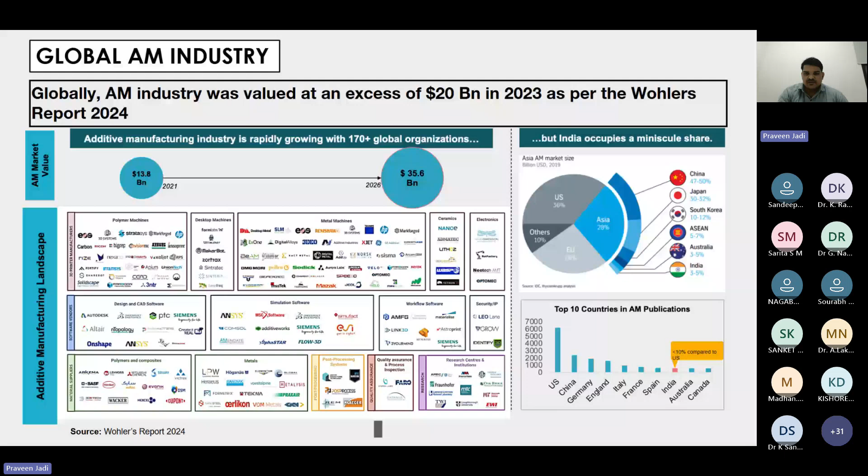So this is the India AM landscape. On the left side you can see international brands - hardware. There are multiple OEMs in 3D printing, like Meltio, EOS, SLM, already in the market for the last 10 to 15 years. You can also see materials like Voxeljet, and very few members making powders or wires. But compared to our domestic brands, previously there were only 1 or 2 members, but recently there are 10 to 20 members doing Make in India 3D printers.

Previously it was only FDM 3D printers, now it has become powder bed fusion. Now Ace Micromatic and Intech are two brands that have already developed metal 3D printers and are selling the machines. In the material section, most brands were previously very few in India, but now one startup, Matrix Nano, we have given startup funding - they have established a facility and developed Make in India powder, meaning they will make the powder itself as per your composition.

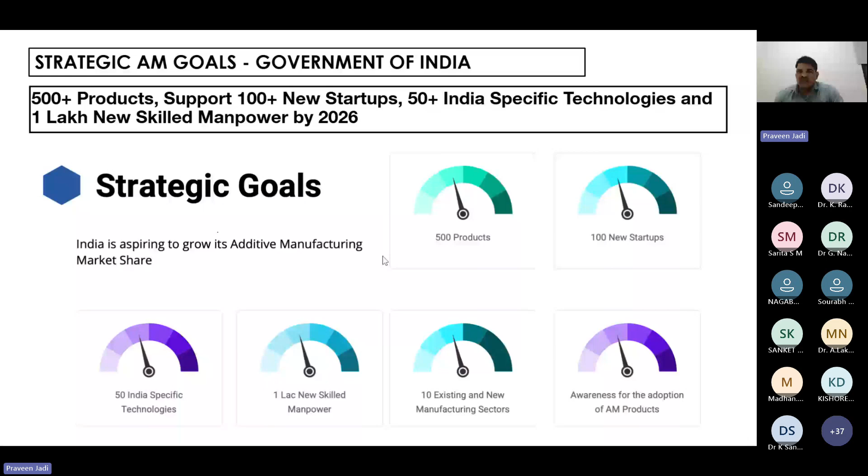NCAM building ecosystem is mainly new product development and Indigenization, as I explained in the previous slide. Skill development - we give training to students, faculty, companies, and also enable adoption of industry readiness. We prepare and give training to industries so that after their learning, they will directly go for jobs. We are also tied up with some OEMs in India.

So, for 3D printing OEMs and 3D printing service providers, if any skilled person or company is interested, we give them access to AM infrastructure. We have a Center of Excellence in Additive Manufacturing in Hyderabad, with plastic to metal 3D printers. You can visit our facility and utilize it for R&D and innovation. If any customer or industry wants to develop something new, we have separate funding for R&D, including one metal 3D printer dedicated to developing new products.

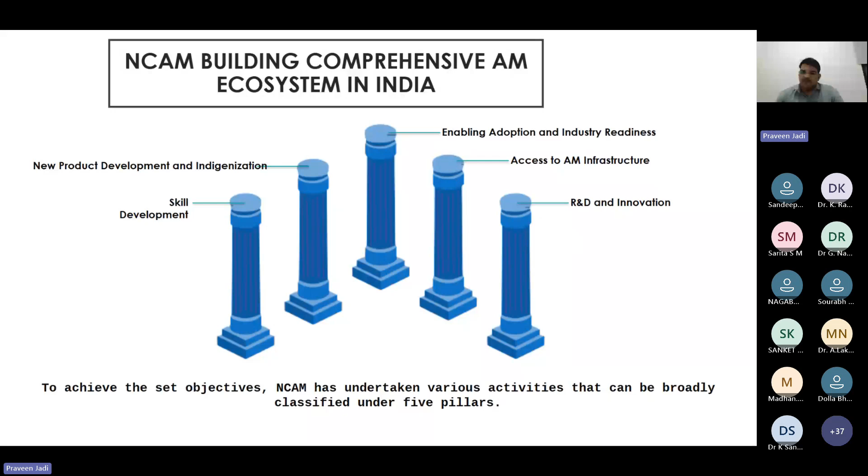This is a sample video.

This video is completely about how additive manufacturing and how NCAM is established. So, is this video visible, sir?

Hello? Yes, okay. Hello, no sir, that video is not visible. This video is not visible, sir? Yes, sir. So what I will do, sir, I will play it later, because it has to play.

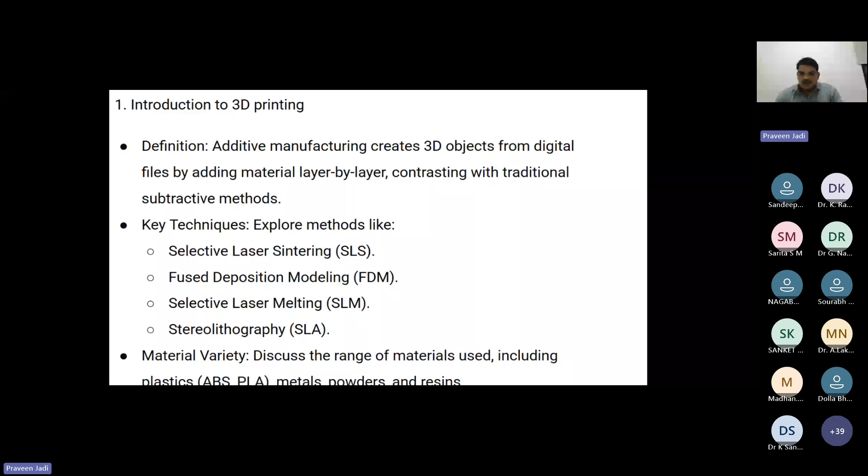There is FDM technology, fused deposition modeling, which is the basic technology. There's also SLA technology, similar to injection molding parts, where we use resin. I'll explain more in the coming slide.

For 3D printing technology, initially we have to think about how the 3D model is created. Now every person is adapting additive manufacturing for their new ideas. So first we go for the CAD model using CAD software like CATIA or SolidWorks or any 3D modeling software, then convert it into an STL file or STEP file, which can be uploaded into the 3D printing software.

Once we upload it into the slicing software, it converts into G-code. For FDM 3D printing, it's G-code; for SLA, there's a dedicated software. So as per the requirement and respective technology, they generate specific codes.

The steps involved in 3D printing: first we do modeling, then slice it using slicing software. For FDM technology, you can use Cura, an open source software. For SLA technology, there's FormLabs software, and others. For metal and SLS, to slice the CAD model into layers, we can use Magics software or Autodesk software.

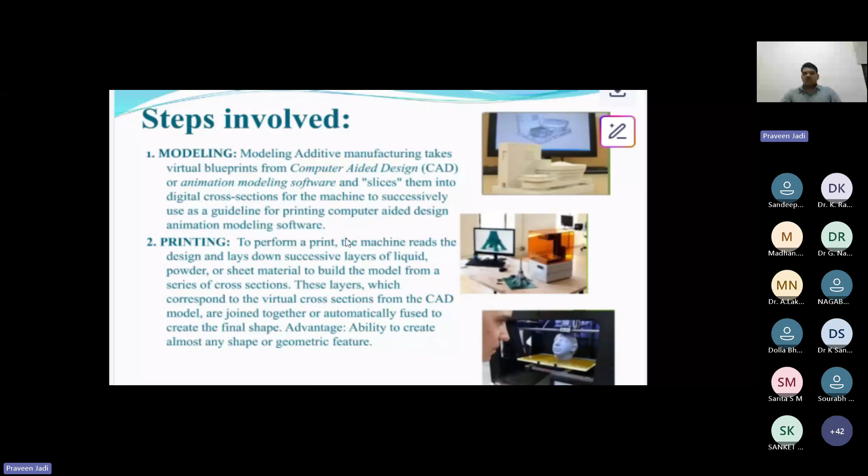The base plate temperature depends on the material used. For high-end materials, the part has to stick to the build plate, so we use build plate heating depending on the material. For ABS or PLA, the melting temperature is around 210 degrees, and the build plate temperature is 60 to 70 degrees. For PEEK material, the build plate has to go up to 150 degrees, and the nozzle temperature goes up to 400 or 395 degrees.

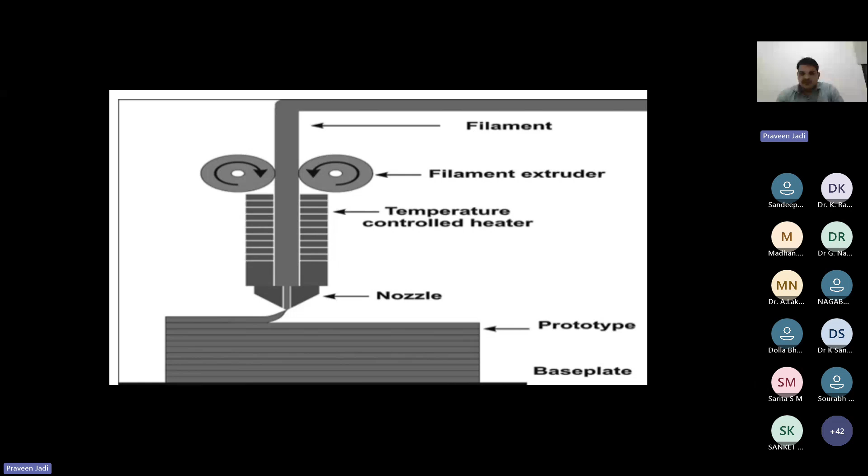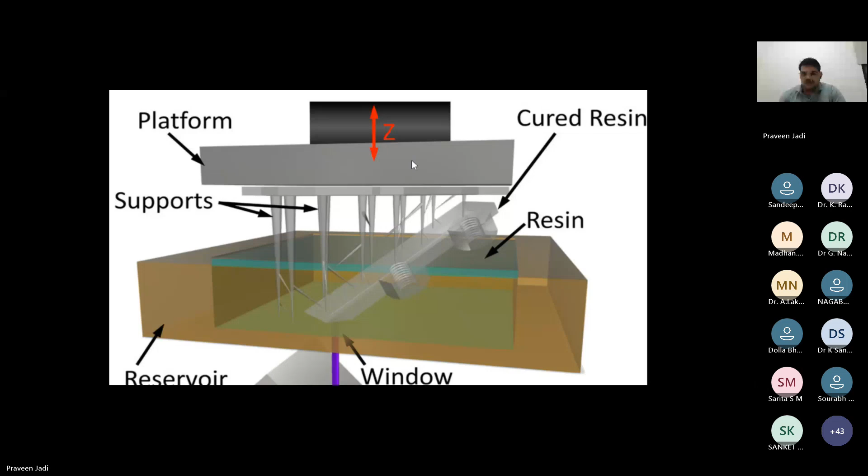Second is SLA technology, where we use resin-based material. There are two types of platform systems: top-down approach and bottom-up approach. In the bottom-up approach, the layer comes from the bottom and the laser cures the resin, and layer by layer the platform moves upward, so the part gets manufactured.

So this process is: once we give the slice to the 3D printer, the recoater will come and spread one layer of coating. Coating means, suppose if you are giving a 60 micron layer, it will spread the 60 micron layer. Suppose if you are giving a 120 micron layer, the same amount of powder, it will spread that layer. Then the laser will come and scan the area where it has to deposit.

Then accordingly the laser will come and sinter the powder. Then similarly another recoater will spread the powder. Then the laser will come and sinter the remaining area. So layer by layer it will form the part from the powder.

But before that, there is pre-production for SLS technology. Before that we have to sieve the powder. In previous technologies, whatever material is there we can reuse. Here we have to use 50% virgin powder, 50% already used powder, so that it will work.

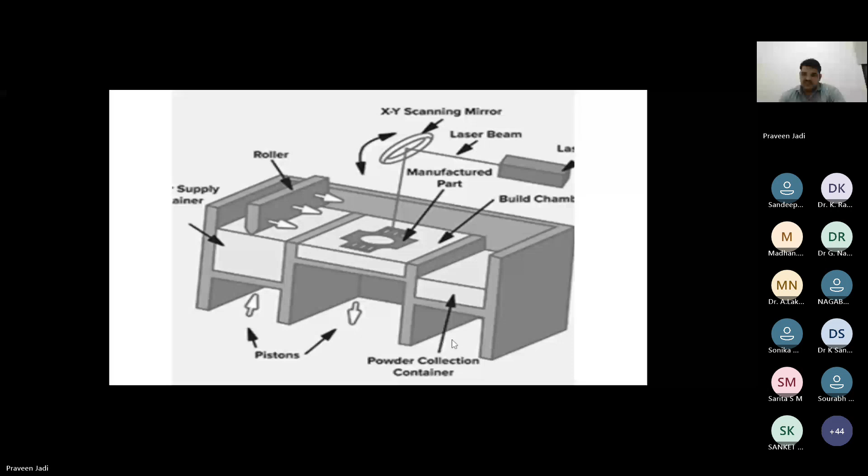This is the powder collector. Once we spread the powder, the unwanted powder can be collected from the bottom. The laser will come and sinter the powder, and layer by layer it will print the parts.

So why does industry adopt additive manufacturing? Because with machining, suppose there is a 10 kg square cube, for a small part we have to waste so many materials to get the original product. But here we are doing layer by layer, so there is no waste of material, and also time consumed is very less. You can use it for mass production.

Now production machines are available. You can go for 100 or 200 parts for the industrial purpose.

Now I am going to explain about this new technology. I have already explained about LPBF, how it works, but electron beam is the new technology where metal parts get 100% density.

In LPBF, we can get 96% density parts because of porosities, and we are using an argon atmosphere temperature, and the laser wattage applied falls differently for different materials.

Suppose if you are using titanium material, the laser needs around 600 watts. Suppose if you are using aluminum material, the laser needs only 95 watts. So depending on the requirement and the material, we have to select the laser parameters for LPBF.

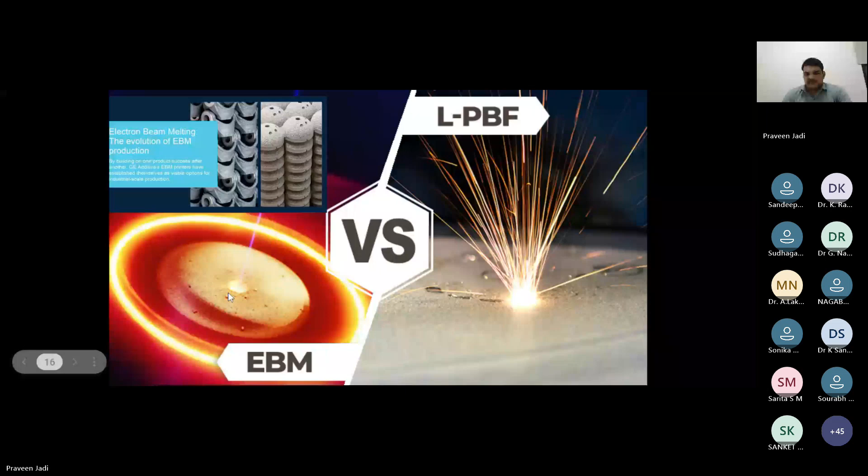This is an LPBF 3D printer. As already explained, the recoater will spread the required powder, and the laser will come and deposit it layer by layer, forming the 3D printing process.

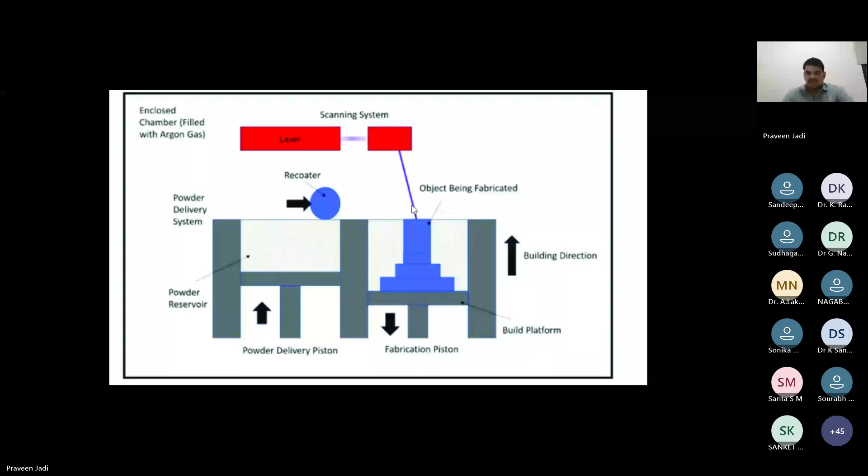For 3D printing, we have to go for data preparation like FDM. But here, for EBM technology, you can stack the part by part. Suppose if your platform is 340 by 340 by 600, the platform can go up to 600 mm, you can change the height.

The electron beam comes and falls on the powder, making it sinter.

Once we convert the 3D file for the metal 3D printer or EBM, it will sinter. Before that, we have to check the powder to avoid internal stresses and to avoid fire inside the chamber. Once we give the sliced part to the metal 3D printer or EBM printer, the process is the same for EBM or LPBF, but the application will be different.

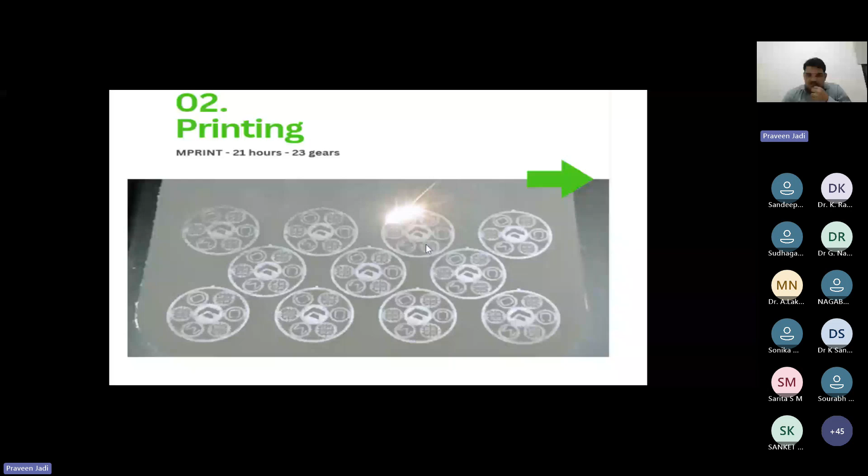Once the part is 3D printed, we have to unpack the material, remove the extra powder, sieve it again, and we can reuse that powder. But whatever parts are there, we have to go for the heat treatment process to relieve the stresses.

Once we relieve the stresses in the annealing process, we have to go for sandblasting to improve the surface finish, using solid blast media like SS beads or glass beads.

So for post processing, once we 3D print a part, we can go for wire cut EDM, or we can go for the bandsaw machine. Whatever parts are stuck, we can remove them using the bandsaw machine.

Once we remove the parts from the build plate, we go for improving the surface finish. If there are any supports, we do the removal through post processing. Once support removal is completed and the part comes off the build platform, we go for sandblasting. This is the post processing technique in metal 3D printing, or EBM technology.

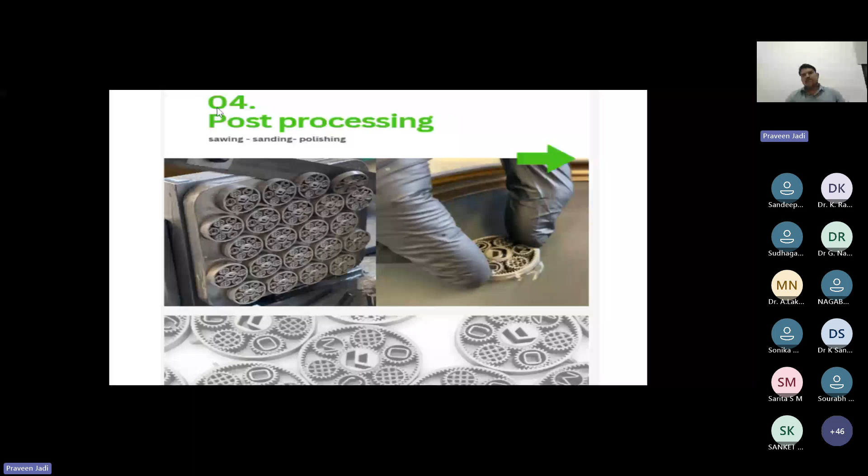EBM technology is similar. The powder is loaded on both sides and the roller comes in, and here we use a cathode beam. The cathode releases the beam and sinters the powder. It is mainly used for dental and medical applications, like cranial or knee joint applications. It gives a 100% dense part, and we can go for stacking the material.

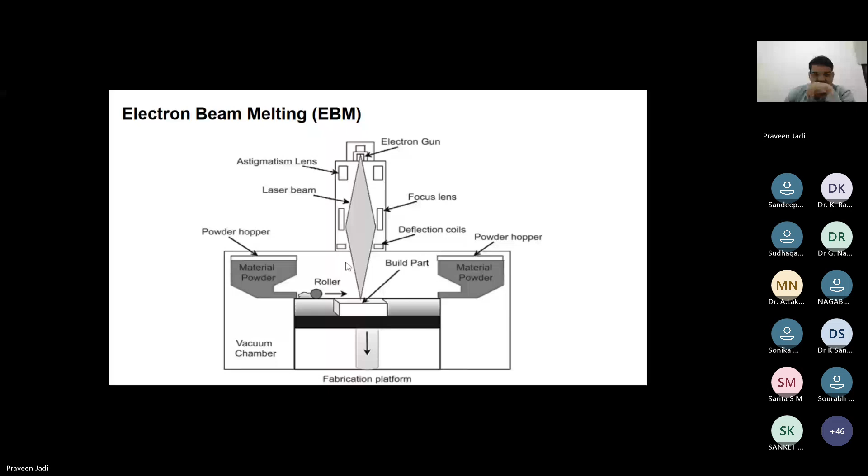For the operating environment, in EBM technology the atmosphere or chamber temperature is vacuum. In LPBF, an inert gas like argon or nitrogen is used, depending on the material.

The material properties in EBM include higher strength, faster build speeds, lower residual stresses, and it's suitable for conductive materials. LPBF also has higher precision, good surface finish, and is used for more intricate parts.

For application, EBM is used for high strength parts, since it gives 100% density parts. So it's mostly used where the part requires high strength or high pressure is applied. There, mostly EBM parts are used.

For LPBF applications, there are high resolution parts. We can get very high finish and high surface accuracy, up to 25, 30, or 60 microns. But for EBM, we have to go for a minimum of 100 to 200 microns.

The advantage of EBM over LPBF is that we can stack multiple parts on a single build platform, so at a time we can print 100 or 200 parts. But in LPBF, we're limited to the build platform area. So if printing 100 parts urgently, you'd use EBM, but with LPBF you can only print up to 10 parts.

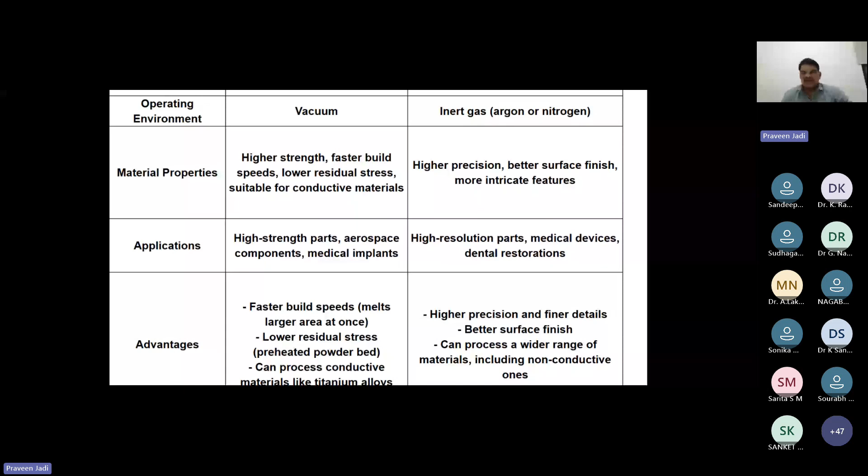The main materials for LPBF and EBM: typical materials available in LPBF are SS316, SS 17-4PH, SS304, aluminum AlSi10Mg, and titanium Ti64. In cobalt chrome, only one material is available.

Copper is still in R&D in most LPBF printers for precision applications, because it has less corrosion resistance. Most space applications are now doing R&D on pure copper for space engine applications.

EBM is mostly used for biocompatible and medical applications. Titanium and nickel-based superalloys are the conductive metals mostly used in EBM. Up to this year, only two materials are qualified for medical applications and FDA approved.

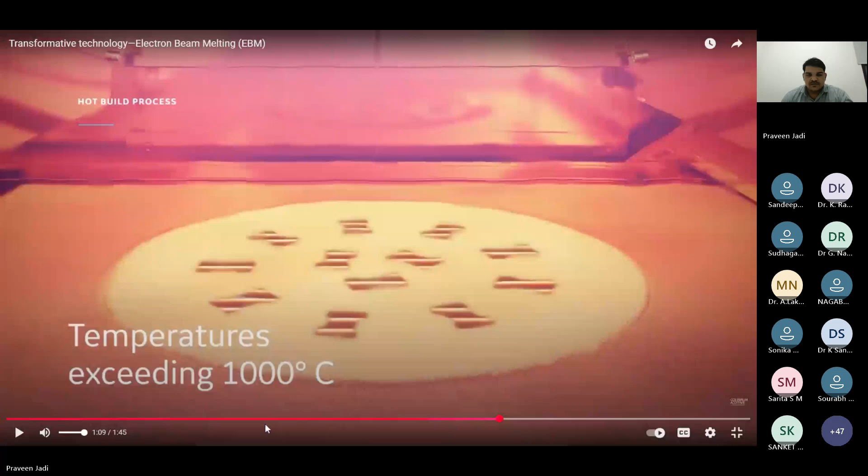Now it is showing, sir. Yes sir, now it's here.

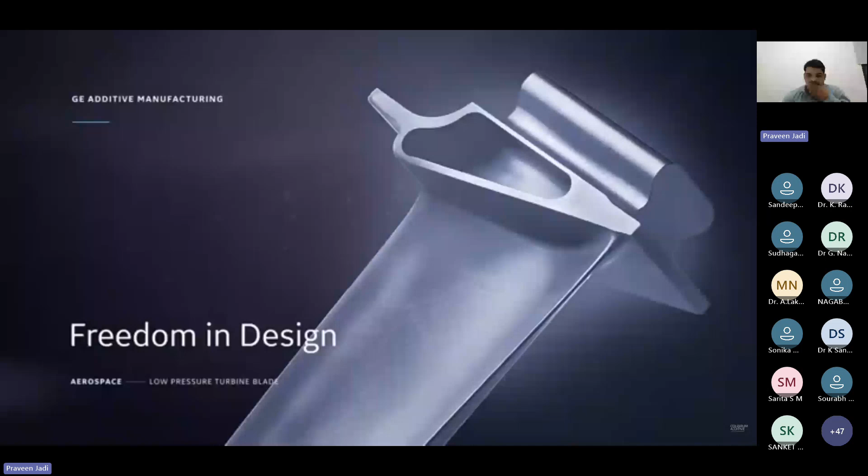Additive manufacturing offers greater freedom in design and allows for the creation of optimized parts that are not constrained by the limits of traditional manufacturing. Arcam EBM has the unique ability to tightly stack parts within the build in order to increase productivity.

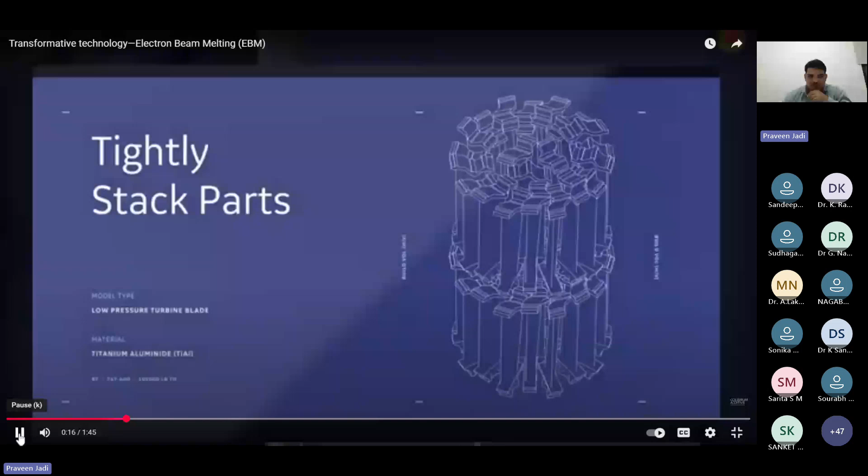An optimized build file is sliced and loaded into the Arcam EBM system. Following this, metal powder is loaded into the machine. The build chamber is then closed and a vacuum is created to ensure a clean, controlled environment that allows for the processing of reactive material.

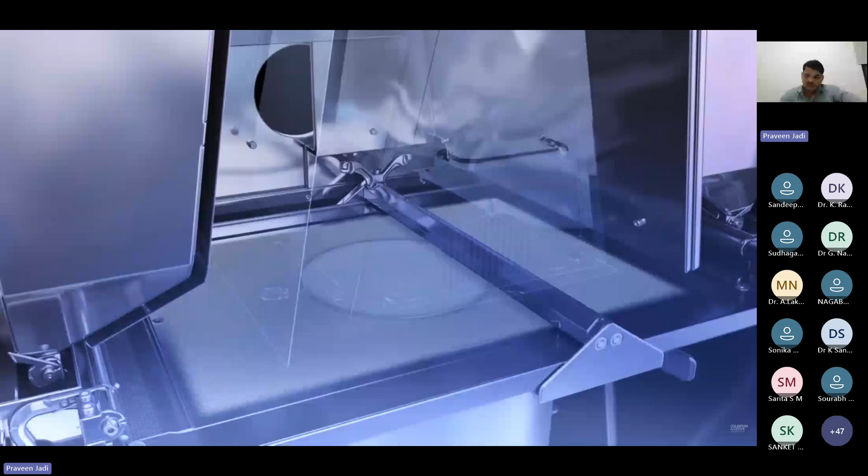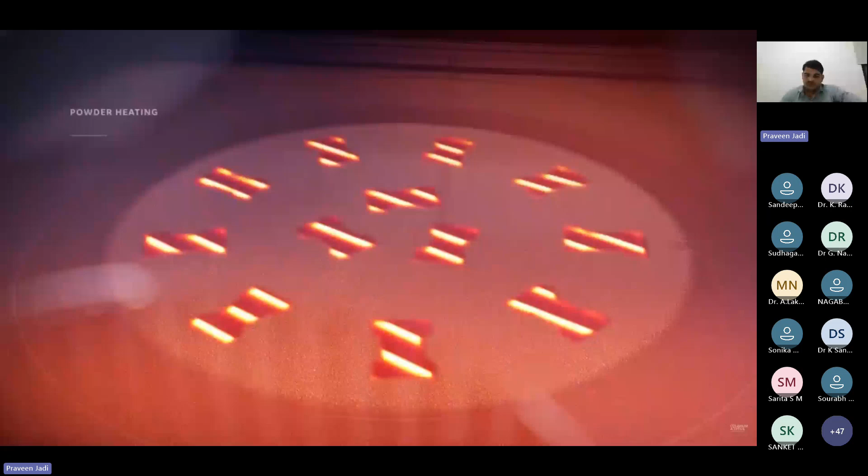Next, Arcam EBM's powder layering system evenly distributes a thin layer of powder on the build area. A powerful 6 kilowatt electron beam heats the powder bed to optimal ambient temperature and then proceeds to melt the powder, first contour melting and then hatch melting. The electron beam unit generating the beam contains no moving parts, allowing for extremely fast and accurate beam control.

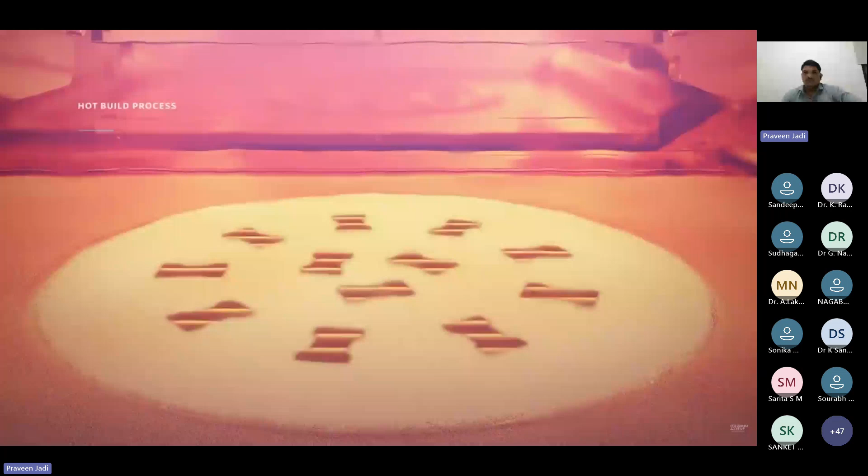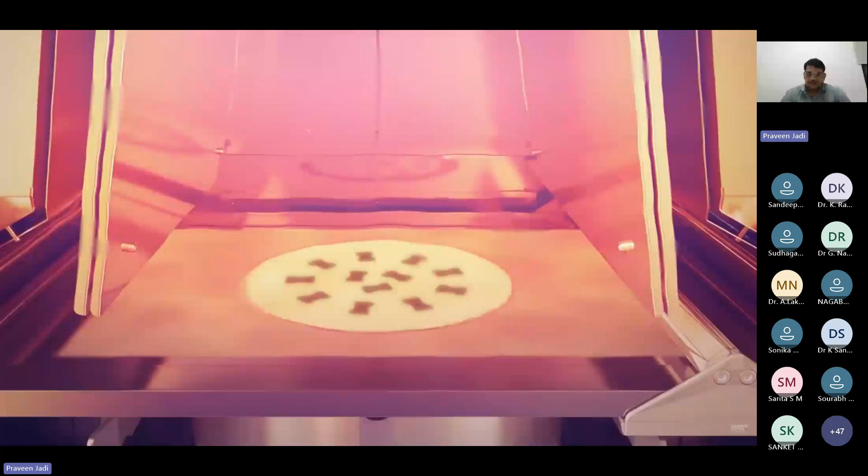The build environment is kept hot, reaching temperatures exceeding 1000 degrees Celsius, resulting in no residual stresses and allowing for the processing of crack-prone materials. As each layer is completed, the build is lowered and a fresh layer of build powder is raked over it. This process repeats, growing the build one layer at a time. When the build is complete, the tank is extracted and the Arcam EBM machine is prepared for the next build.

Hello, sir, my PPT is visible now. No sir, the PPT is not visible. Now, sir. Yes sir, now it's visible.

Okay, now the hybrid manufacturing, sir. Previously I explained about EBM, how it works and what post-processing we have to do. But in hybrid, similar to how vehicles nowadays are hybrid petrol and EV, hybrid manufacturing lets us install a probe, like a laser head.

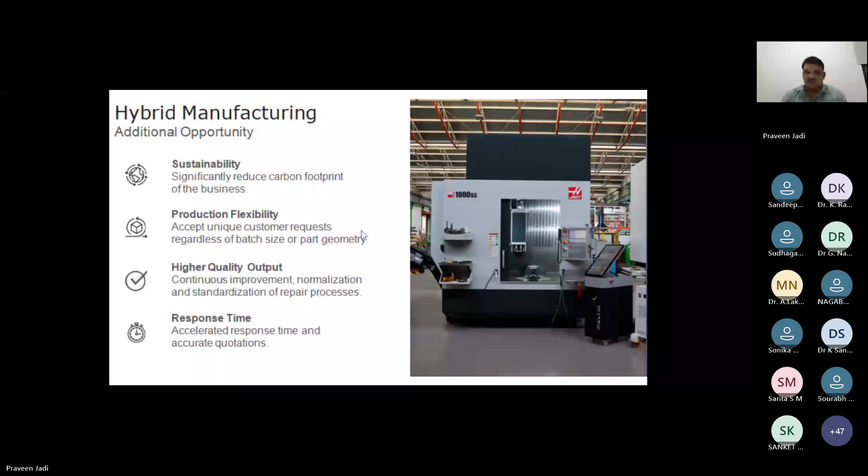Some of the parts we have printed in hybrid manufacturing in DED. So these are the solutions - there are so many products available. I'm covering Meltio engine CNC integration for hybrid manufacturing, repairs, and future additive applications, which I am going to explain. I have explained about this.

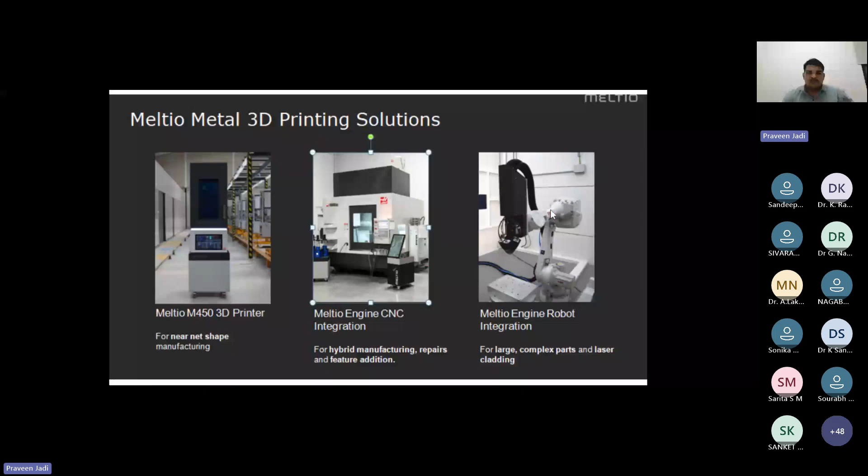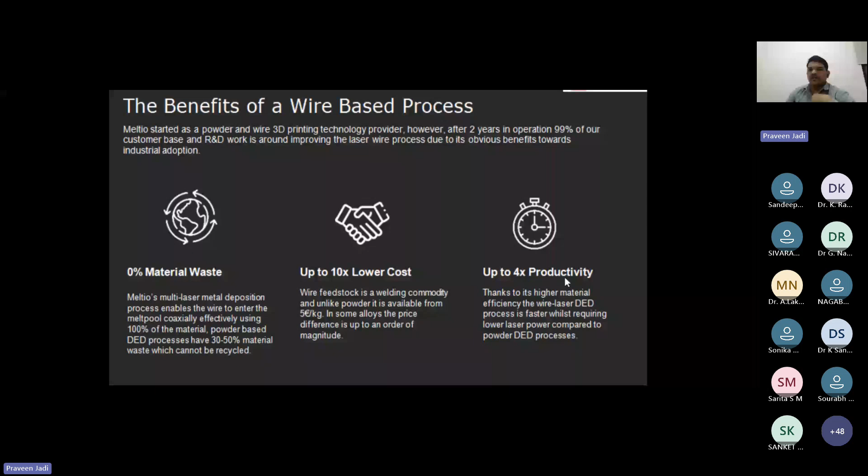This robot is for bigger parts. So the benefit of a wire-based process is we get zero metal wastage, and it's very fast compared to CNC. The cost of material is also very less because there's no wastage, and it's readily available in the market. Productivity is very fast because in CNC they take one week for production, like machining one component. Here we get it in 1 or 2 days, so time is reduced and productivity has increased.

So the benefit of hybrid manufacturing is on material scrap. Suppose if we already have CNC wasted material, we can convert it to wire and use that wire. Here we use 1mm or 2mm diameter wire, depending on the wire diameter we have to adjust in the slicing software for hybrid manufacturing. So if you are using 1mm, we have to select the 1mm diameter to load the 1mm material.

It also helps working capital by replacing inventory of cutting tools. You no longer need to spend on cutting tools in-house, because whatever tool you need, you can use a digital inventory like CAD models. Whichever part you need, you upload the CAD model into 3D printing and get the 3D printed part.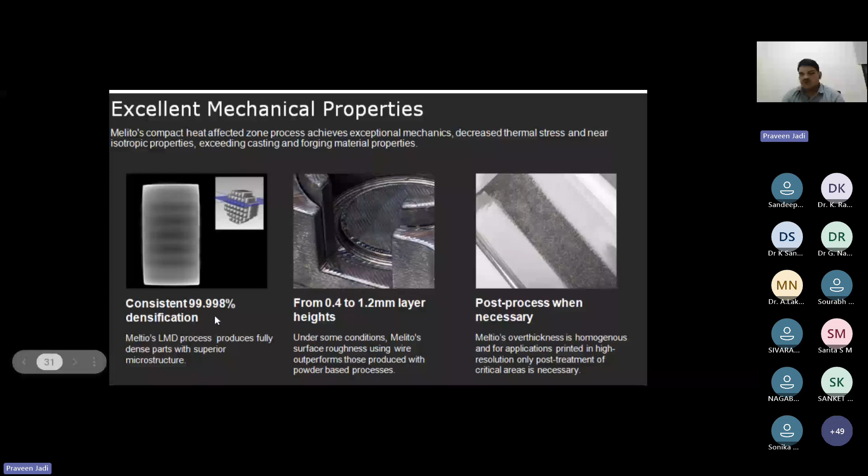You can see the LPBF machined part. Previously we get the LPBF 3D printed part, and once we machine it, we get this quality. In hybrid manufacturing also we get this type of part, but the surface finish is much less. Once we do this part in hybrid manufacturing, we get output like this. In LPBF we get 96% density, we can't get 100% density, but here with hybrid manufacturing we are getting 100% density.

These are the main real world applications already used in industry in different countries and applications. There are so many applications used, and we have taken a few case studies already - it has succeeded. We've taken a few case studies in different applications like aerospace, and also two case studies each in automotive, medical, construction, and consumer goods.

Medical applications are mainly used. Previously, around 2010 or before, 3D printing was not there in India, so they used general standard orthopedic implants for bones or knees, whether for babies or for bigger men above 20 years of age - everyone used the same general, non-patient-specific tools. But once 3D printing came, whichever patients require it, we go for patient-specific MRI scanning. Once the MRI scanning is done, whatever slides are there, that scanned object is converted into an STL model or step model, then we go for 3D printing.

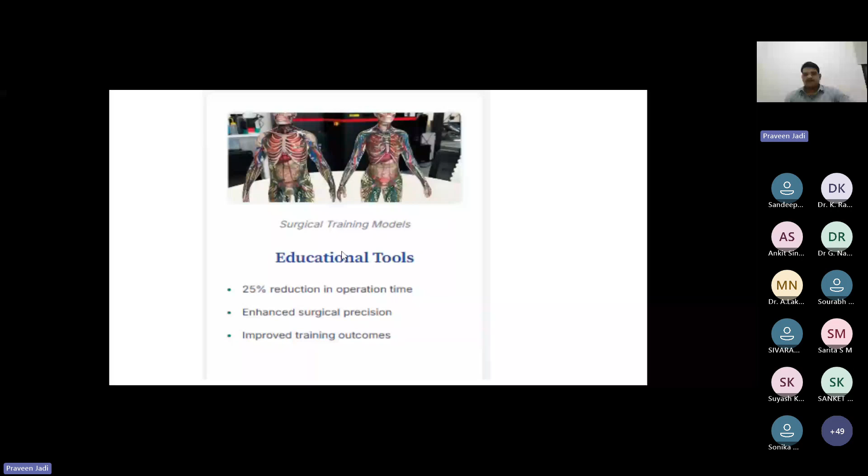The process is the same - MRI scans are converted into a model, then we go for 3D printing, giving unprecedented design freedom. This type of part cannot be made by machining or any other process, but in 3D printing we can print these lattice structures. We printed this in around 2 hours, then after printing we go for heat treatment, and deliver within one day - this Stryker implant in Delhi.

Yes, this is a titanium spinal implant, and it's FDA approved. Previously they would use welding or milling processes with multiple steps required. But once 3D printing is completed, we deliver this part in 2 to 3 days, and it's already being used in patient specific cases.

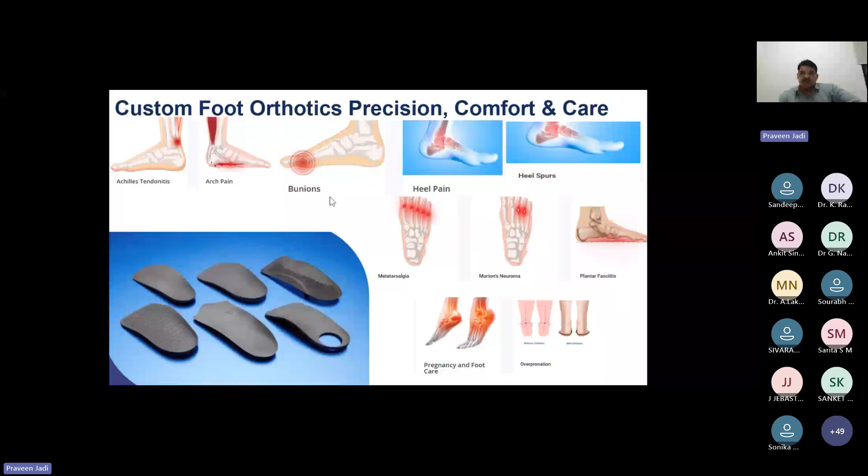This is a real case application - one of our startups is doing this in India, and we have funded them. He is already an orthopedic doctor, an orthotic and prosthetic specialist, and he is already working on it.

Coming to another application - energy and tooling. This type of part is very difficult in CNC. Even if possible in CNC, for a turbine blade it would take a minimum of 1 month. This part's customer is Siemens gas turbine blades - they printed it in nickel alloy Inconel 718 in just 1 week, and delivered it to their end customers. The benefit here is we use processes like DMLS and LPBF.

We achieve 96 to 98% density of the part, and the benefit is 30% better cooling efficiency. This part experiences high pressure and high compression since it's used continuously. So we do simulation analysis - thermal analysis, thermomechanical analysis - before going for printing. There are simulation softwares available, and we must run simulations before printing to confirm whether the actual application will work or not.

Next is customized and lightweight, ready fast. Manually it takes 2 to 4 weeks, and for CNC it takes 5 to 7 days for this part, but the 3D printed part we deliver within 48 hours.

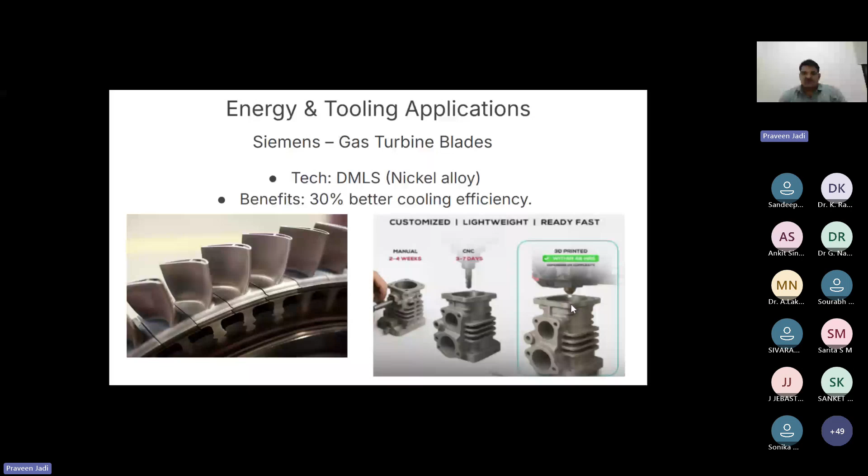Next, Boeing environmental control ducts - you can see these parts. Boeing's 787 Dreamliner is demonstrating additive manufacturing for critical load components in modern aircraft. Previously the part looked like this, but it was a bit heavy. So in CNC machining, the customer did topology optimization without changing the application - it remains the same part as before, but the weight is reduced.

What they did is change the infill - previously it was solid, now they changed it to hexagonal, triangular, or rectangular patterns inside the part, reducing the weight. For CNC machining, one part takes 3 days, but with 3D printing, within 3 days they supplied around 10 parts. You can see the weight reduction here - since it's an aircraft, weight matters; even small part weight reduction increases efficiency. This is also a complex geometry, and not just this - any complex geometry not possible in CNC, we can print in 3D printing, including assemblies.

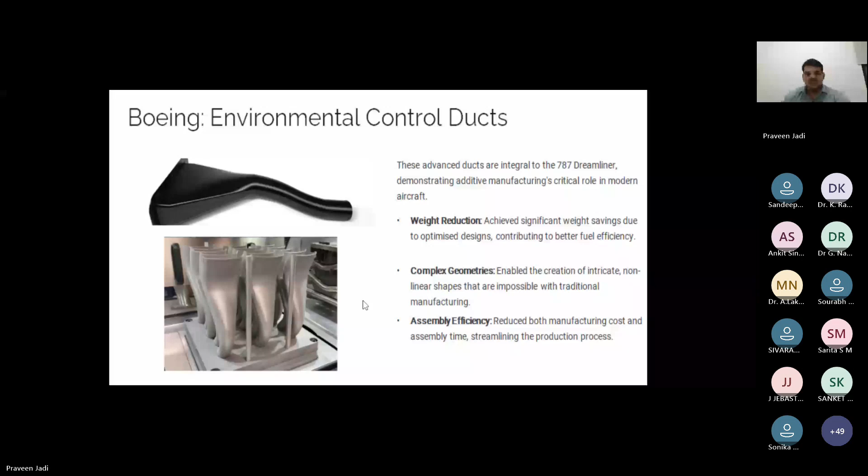Some of the aircraft components, engine parts, fuel nozzles, LEAP engines, they have already tested. Turbine blades, just now I explained. Combustor liners, Pratt and Whitney in cobalt chrome, Pratt and Whitney in Bangalore company, they are already doing turbine blades also. Heat exchangers, Honeywell USA, they have tried and printed heat exchangers. Bearings and seals for ceramic composites and binder jetting, they have already used.

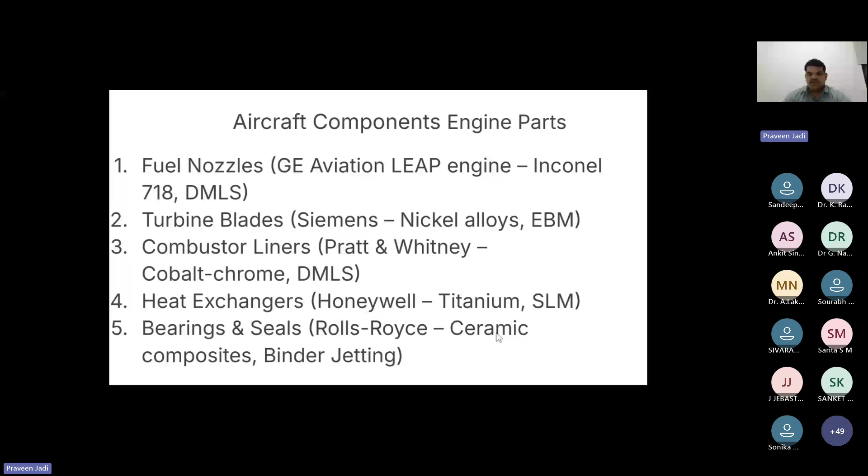Suppose in CNC machining, specifically like for robotic applications also, you want specific jigs and fixtures to hold the part. So for small design changes in their model, it is very difficult to go for the mold. Then making a part is very difficult.

What they have done is they have printed a 3D printed part, and initially tested it in FDM technology carbon fiber. The carbon fiber nylon is equivalent to aluminum material, same equivalent strength to aluminum. So here they reduce the time by around 50% reduction and it's faster. Cost is very less because if you go for aluminum, that cost is very high. In carbon fiber FDM technology, the cost is 50% reduction and also fast.

Suppose this same part, if they want to go for the mold, mold making will take 1 month time for CNC or any injection molding part, but it is in validation stage. After converting to the mold, if there are any deviations, it is very difficult. But in the initial stage they used 3D printed parts. Any design changes also they have done, and after that finally they have assembled it. Once this assembly is completed, they go for mass production, thousands of units. So here time is reduced, cost is reduced.

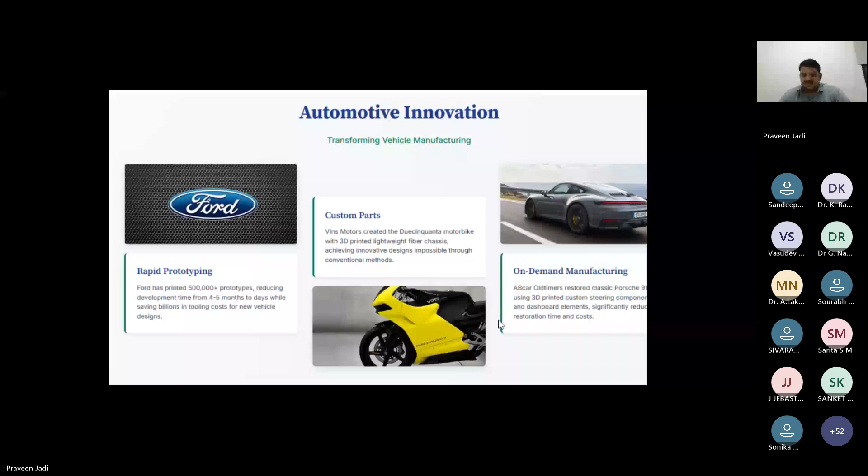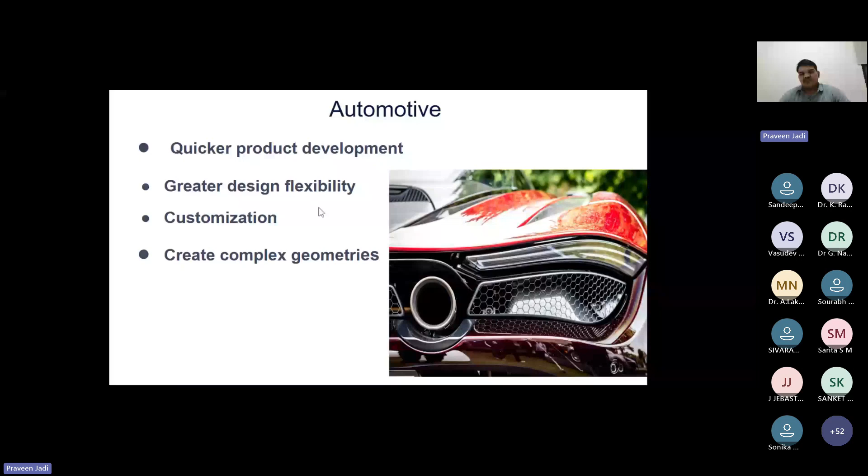Automotive also means quicker product development. Now Tata Motors are doing this, Maruti Suzuki is doing it, Royal Enfield is doing it. Any automotive company, not only automotive, EV industry also in bikes. Before going for mass production, before launching, they want to test the prototype. Ola also, they are using this. Ola also goes for prototyping initially, others also go for prototyping initially. Once the design is final, they go for final production.

As I explained before, Ford or BMW, these are prototypes before going for mass production, just to check the feasibility.

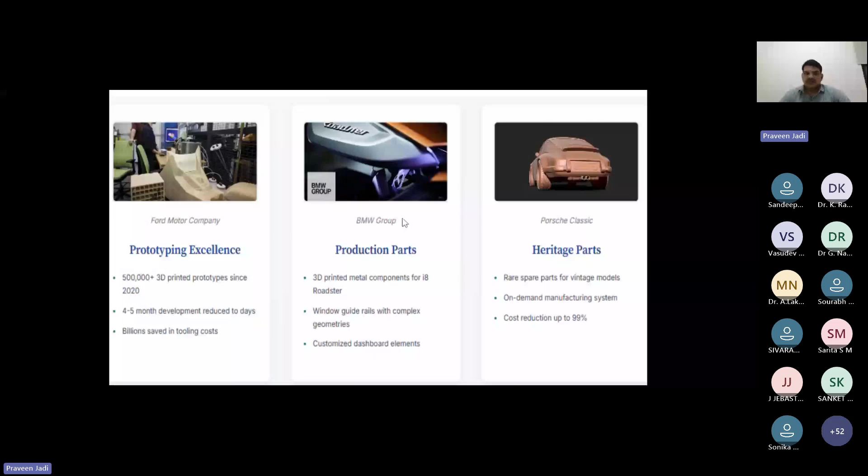Automotive applications case study is Bugatti titanium brake caliper. You can see this part, there are so many curvatures, so many angles, thickness is less in places. It is a brake system. We have to apply sudden brakes sometimes, so it has to withstand that.

Previously this type of part, they would go for high pressure die casting, but for high pressure die casting they have to go for a mold. Once the mold is completed, even if the part is not properly assembling, the mold cost is very high. It will take like 3 to 4 months for a high pressure die casting part. So what they did is they initially tested using 3D printing, and directly used it, resulting in the first largest 3D printed caliper. The weight of the part is very light, and post processing also took very less time.

Second, piston rods, same application, for lightweight and better fuel efficiency. 3D printed pistons, Porsche has used. Same machining components, high pressure die casting, they have to go, but due to new technology they have explored it, so they get the benefit of 10% more power, fuel efficiency, and more mileage. You can see the images here.

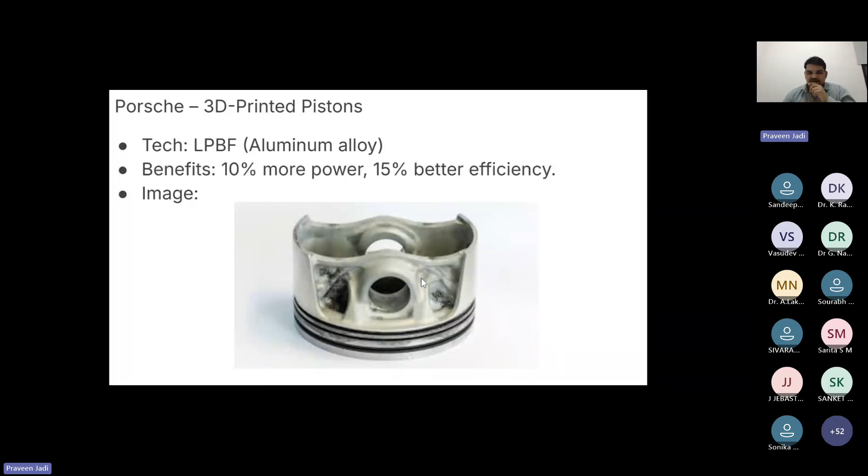BMW Group ergonomic assembly aids, custom grips. The robot need depends on the part, and they want to change the custom grips for faster production. If you go with any conventional manufacturing process, it is not immediate, you can't get the parts quickly. In 3D printing, you can get custom faster production, and improve worker comfort. Suppose when the robot is working, manual interaction is very high previously. Now once 3D printed comes, whatever specific parts you need, you can directly use that 3D printed part as an end use part.

This is the tapered bearings which is used for the BMW braking system, where very high pressure is applying. So this type of part is very difficult in any other technologies. The bearing needs to withstand high temperature, high pressure, and high compression also. So initially they tested in 3D printing, they tested and validated it, and they have used it for the bearings. So now they are using it. They have in-house machines of 100 plus in BMW company, directly printing 3D printed parts for the customized BMW cars.

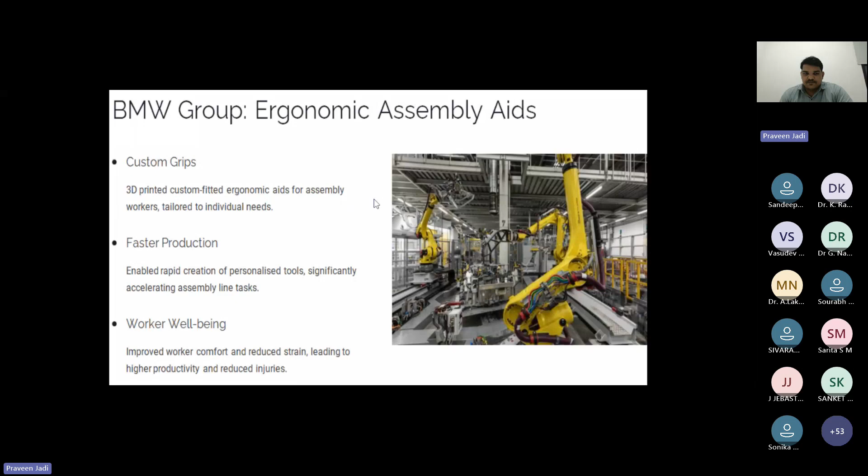Here you can see the benefits. There is no tooling, no multiple rotations needed for this type of component. If you use a 5-axis machine, we have to go for 3 to 4 rotations, meaning around 3 to 4 days it will take. Without tooling, this part in 3D printing you can get in 1 hour or 2 hours. Maximum post-processing will take like 2 to 4 hours, then you can get the physical component as it is.

Here your cost is very less. You can get this part in 1 to 2 days, so here time is reduced. You can print more parts in 3 days. Suppose if your build platform is very high on your metal 3D printer, at a time you can print 20 to 30 parts. So in 3 days you can get 30 parts. With tooling, in 3 days you can get only 1 part.

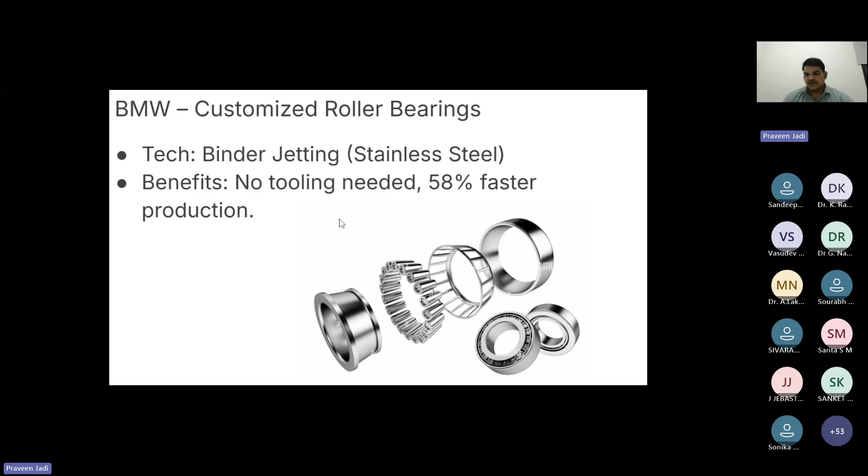So here, water pump motor sports car. Previously they go for high pressure die casting, but using aluminum AlSi10Mg, this is printed using SLM technology. Then this suspension mount bracket, you can see any vehicle suspension is very important. We can get more pressure and more compression, so here they have tested with titanium material. Titanium material is very strong. So the mounting brackets and drive shaft sliders, Red Bull racing car using this, resulting in a 90% material reduction.

Previously this part was solid type. So what they have done is simulations, topology optimization. Topology optimization is nothing but, whatever pressure it will withstand as per requirement, whatever temperature it will withstand, whatever load it will withstand, that application it will show. But wherever the unwanted area is there, the software will remove the unwanted area and reduce the part weight.

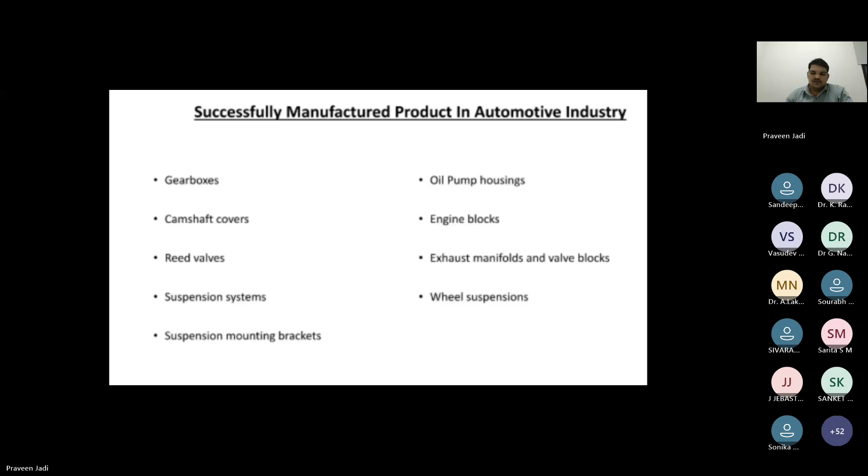In aerospace and defense, most metal 3D printing companies are using metal 3D printing in aerospace and defense, and some composite 3D printers are used for drone or space applications. Mostly aerospace and defense use it for functional prototypes for end use. Some companies use it for tooling, some for lightweight parts. Lightweight parts means you can consider drones. Drone parts need lightweight parts, and space applications need lightweight parts.

The benefit is, for low volume production we can go for 3D printing instead of conventional manufacturing. Without changing the design, wherever there is unwanted area, it will be removed by topology optimization. That is an advantage. Material efficiency, whatever material they use in conventional manufacturing, we can also get material efficiency in 3D printing. Part consolidation - before going for the part, we can use it as an end use part and do part consolidation.

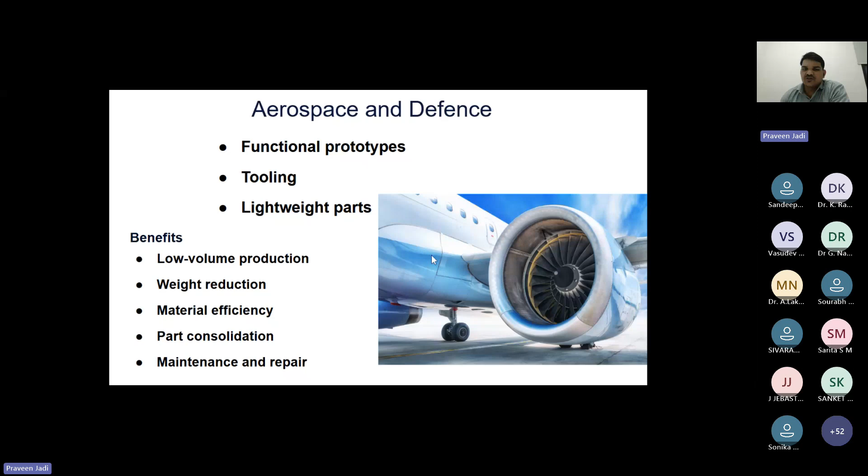If any part needs repair, suppose a part is broken during usage of the aircraft or drone, that part we can immediately print. If you have a solid or STEP model, we can immediately print that part and use it. So aerospace applications include engine components, structural parts, space applications.

In space applications, Indian startups like Skyroot Aerospace, Dhruva Space, Agnikul Cosmos, and Spatric Aerospace have already launched 3D printed rockets in the last 2 years with ISRO. Now they are doing R&D on other series of space applications, printing maybe in copper, Inconel, or titanium engines for long life.

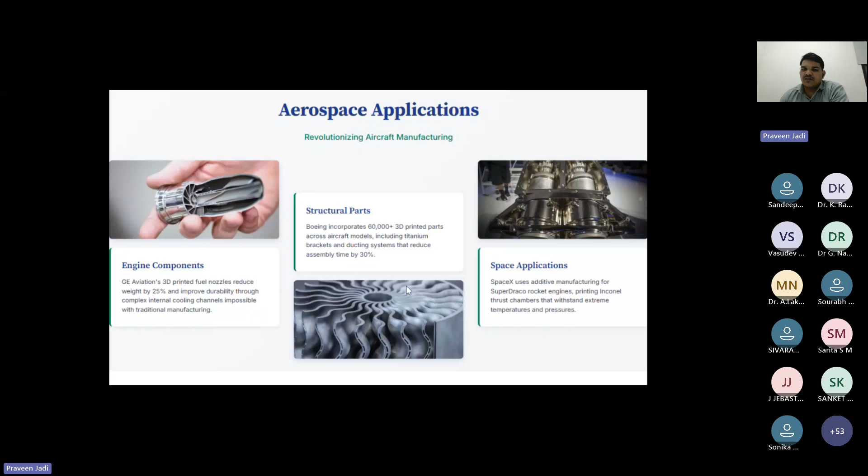In aerospace and defense, most industries use it for MRO applications - for maintenance. MRO industries: here, maintenance is needed for spare parts. For maintenance they will use repair. Suppose a part is already broken, by using DED technology, wherever the part material is removed, that area we can use for repairing the spare parts.

Hello, is my voice audible, sir? Yes sir, your voice is audible.

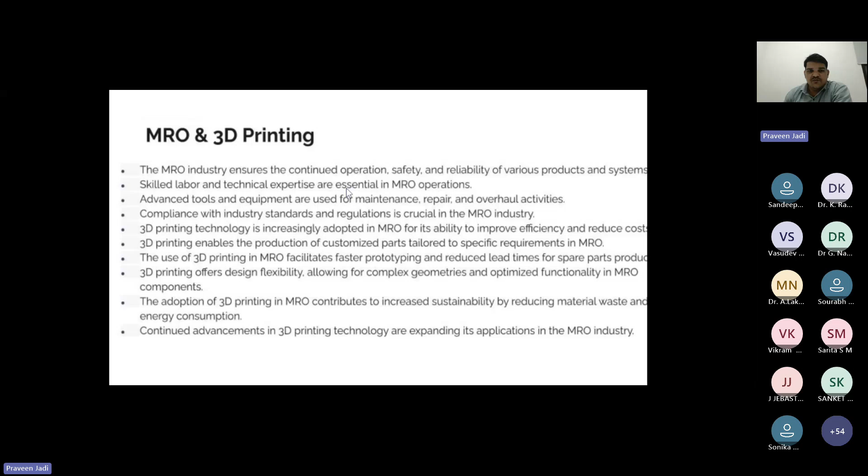So mostly the aviation sector now uses metal 3D printing for space applications. In aviation applications, for any aircraft to consume less fuel and give longer travel, we need lightweight structures. So whatever parts are there, we have to do topology optimization, because topology optimization means the part will be used the same but it will reduce the weight of the part. And fuel efficiency - if your weight is reduced, fuel efficiency is automatically more, giving more mileage.

Engine parts, some turbine blades or nozzles, we can print in 3D printing, and if the part is all printed, it will automatically enhance the performance and lifespan of the engine. So spare parts, any on-demand spare parts we can also print if you have CAD models, without depending upon conventional manufacturing.

So for aerospace applications, this is the LEAP fuel nozzle. Previously this part was very big - they had to go for milling process, welding process, joining process. They had to go through conventional processes for like 20 parts. So here, once we did the simulation, we converted this into a single part, and we printed it as a single part.

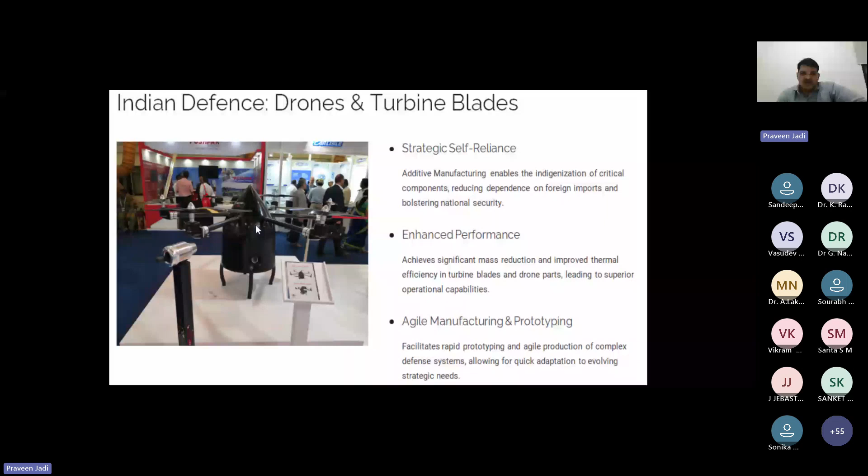We have printed a lot for drone applications, for different space applications. Some canopies we printed, some top covers we printed, some load areas are printed. So with that, they don't depend on other manufacturing processes. Instead, they are getting it within 2 to 3 days, making that prototype, and going to market for selling their demos, their drones.

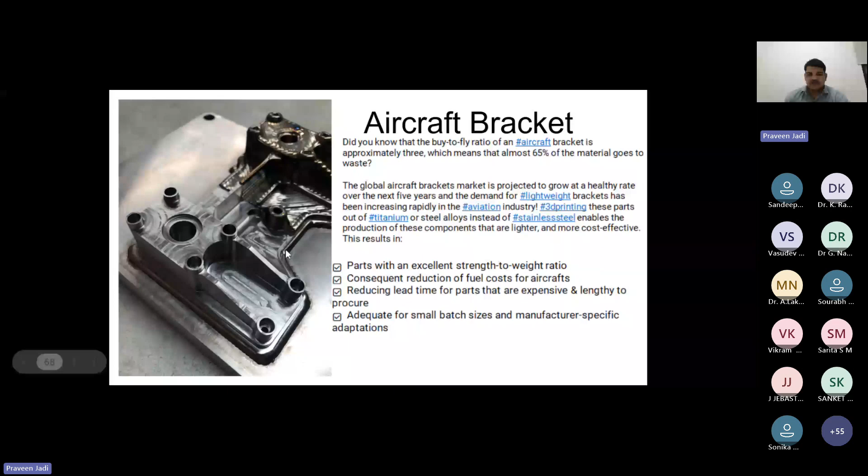And here this is a 3D printed part, and this is a machined part. This type of part is very difficult in CNC machining, and it will also take so much time. So the drill bit needs high strength for drilling the holes.

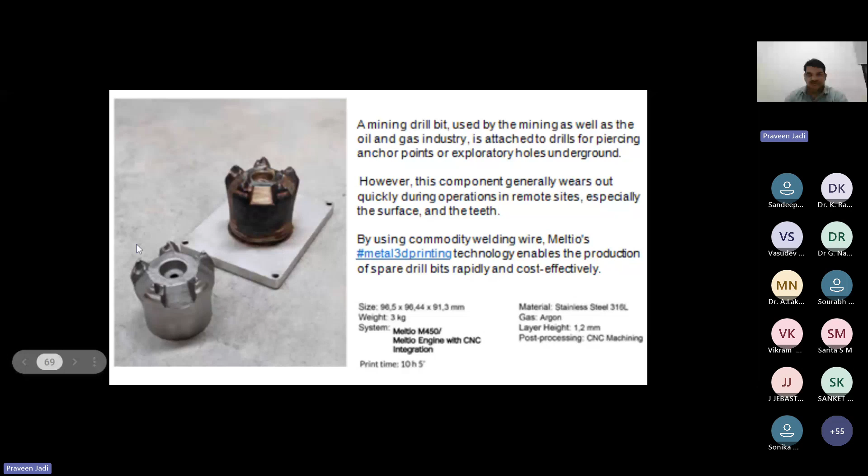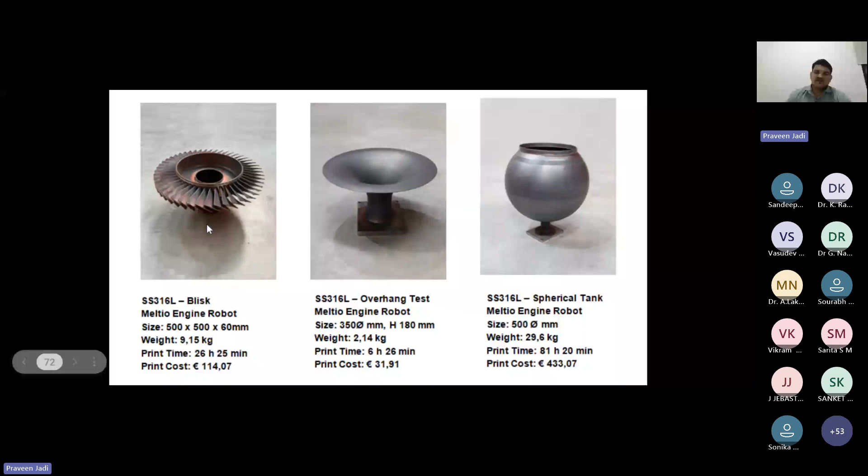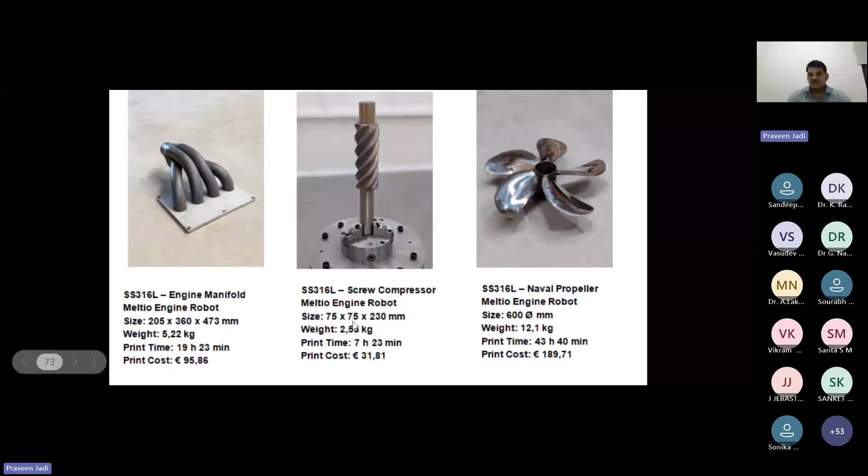You can see all the parts. If you go for any conventional machine, the cost is very high, time is very high, but 3D printing cost is very less. You can get the part as it is, with as-is mechanical properties.

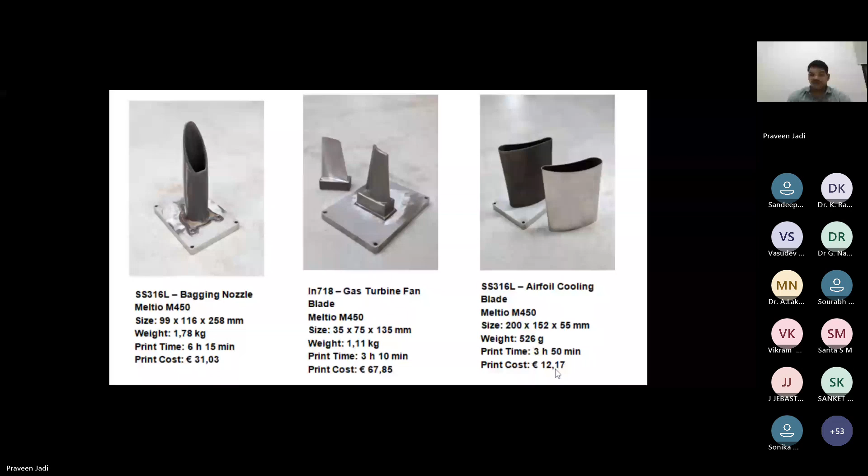So in aerospace applications, there are so many areas where they use it as replacement for on-demand production, such as brackets, clips, housings, covers, knobs, and other small to medium-sized components. Prototypes and mockups before going for the final design. You can see drone applications, space applications, and fitment testing also they will do. Tooling and fixtures for material holding devices.

Different machines have different fixtures and different tools, and depending on the part we have to do tooling and fixtures. For machining it will take so much time, so as per the specific part required, we can go for 3D printing tooling and fixtures, ducts and housings, wherever ducts and housings with intricate geometries are needed, we can print that part.

And composite repair patches - if there are any repair parts needed, any repairing, we can use repair parts by using DED. And interior components - cabin fittings, seat parts, tray tables, storage components, and decorative elements - can be manufactured easily by using 3D printing.

Spare part production, on-demand spare production. Now most aerospace, defense and army sectors are adopting additive manufacturing, because in war, like Ukraine or Russia, they are using 3D printed parts. In war they install 10 to 20 metal 3D printers; whichever part is broken, they immediately do reverse engineering by scanning the object, converting it to a step file.

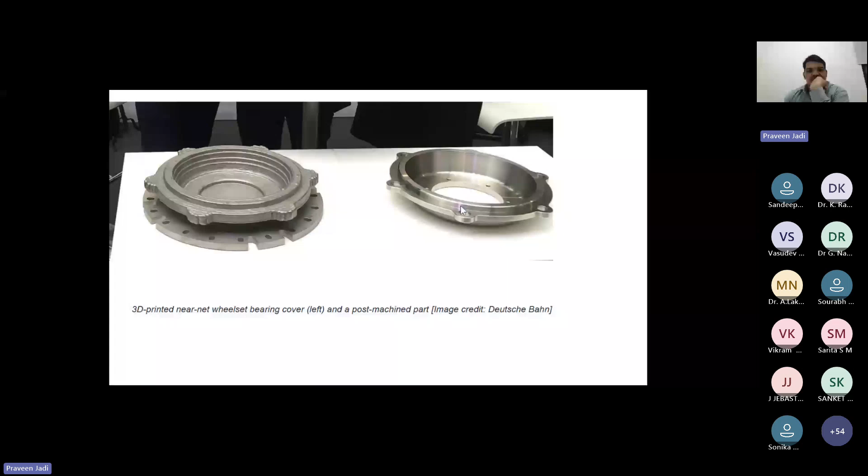Airbus has experience with 3D printed plastic parts and metal brackets. With plastic parts, there's a process of investment casting - they get a wax pattern. Once we have the wax pattern, we go for whatever material, suppose you want metal, titanium or Inconel. For mass production, you pour that material into the wax.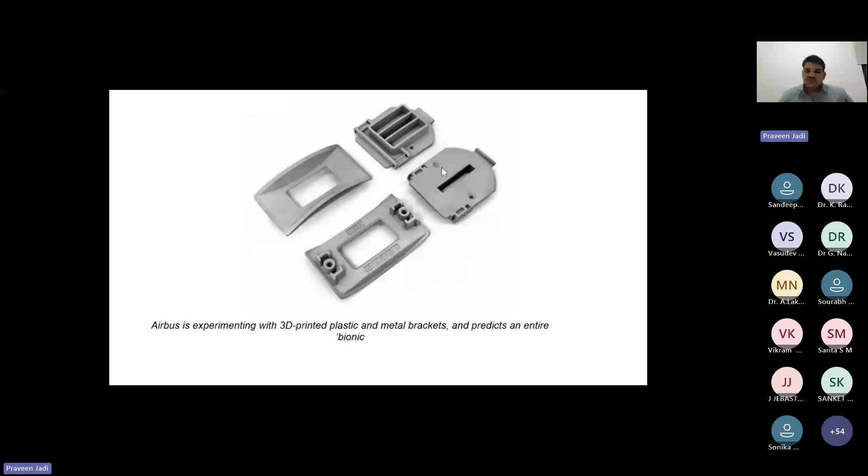Then the wax is removed and the exact metal part comes out. Once done, we do polishing, improving surface finish, or sandblasting, and you can get mass production of the parts.

The key takeaways for aerospace - mostly they go for space applications, where weight reduction is a very main criteria, but by using topology optimization, weight reduction is already done, and part consolidation also we have done. For automotive applications, performance gains and customization as per modification as per the model - if you change any new product developments, you can go for new product development. For medical, you can see patient specific solutions already done.

Energy tooling gives cost and time savings. Comparative benefits for aerospace - you can see waste savings are 20 to 40%, and cost reduction is 30% reduced.

Hello, sir, is my voice audible, sir?

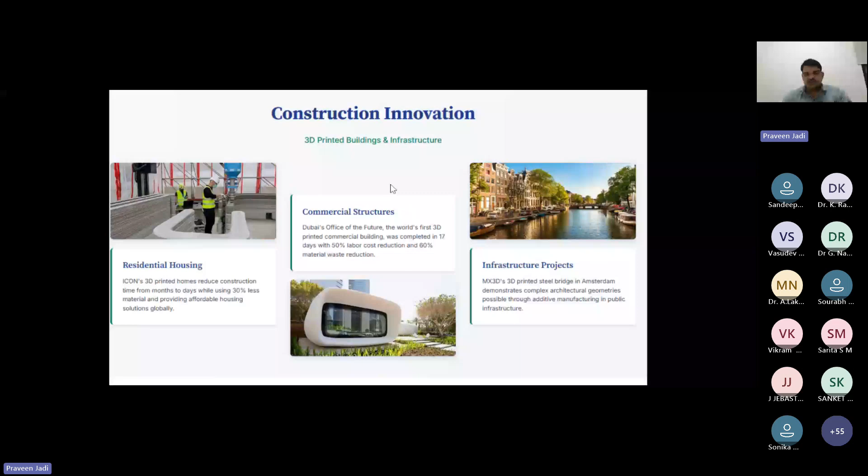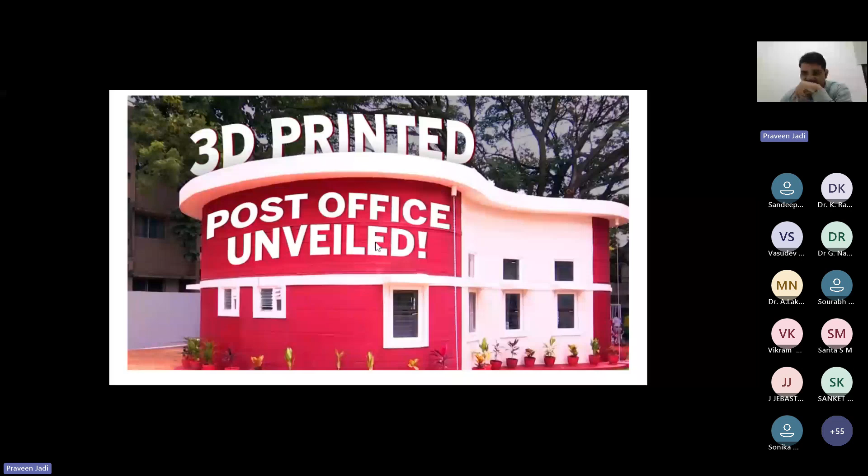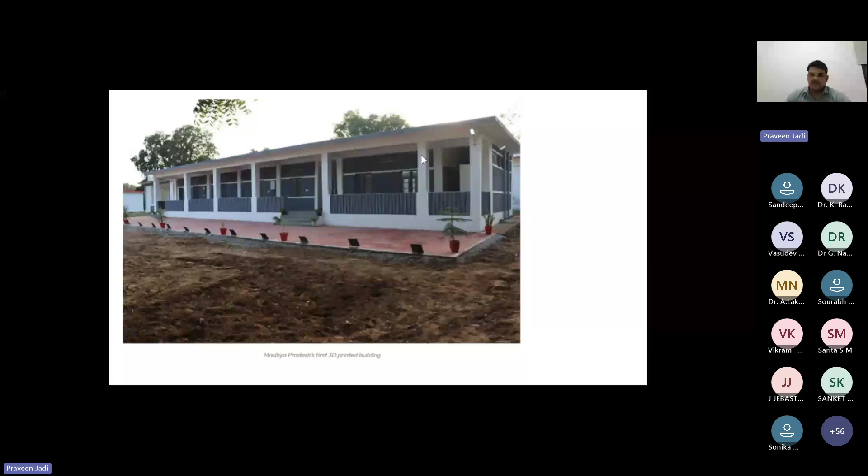This is Madhya Pradesh Army. They printed this whole building in 4 months with an interior company called Simpliforge, for their army office. Whatever concrete they use has similar properties and strength to generally used cement and sand, and it will give more life because the structures are printed like locking type structures, so the life of the house is increased.

What they do is print 1 meter by 1 meter or 2 meter by 2 meter parts, then join them together. They do post-processing like painting, putty, or coloring, then install them in their respective areas. So whatever construction companies I have shown, all of this is done in India.

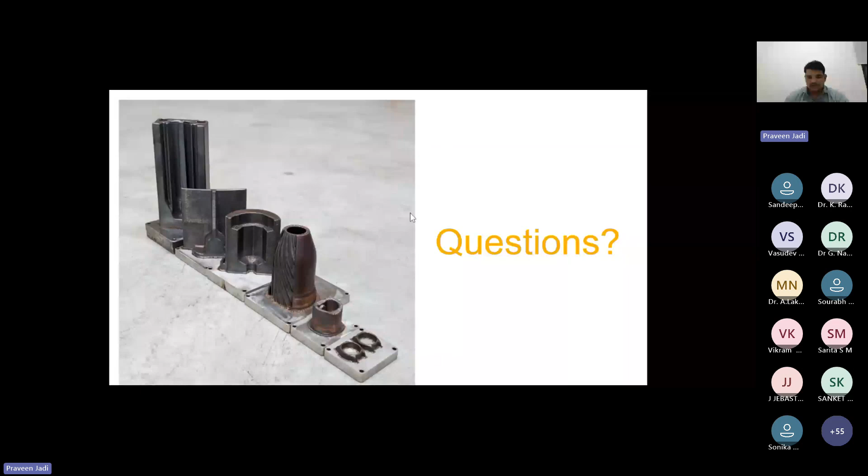Good evening sir. This is Professor Malleshwar Rao, sir. Yes sir, just now you have shown that villa 3D constructed in Pune. Sir, what sort of materials do they use for that?

They are mixed with concrete, some glue type of gypsum, concrete and gypsum, and some type of chemical for the bonding, sir. Three types of material they are using.

Sir, is it a fire resistant one? Yes, fire resistant, sir. It is already approved. So most of this you can see in India now, but before, like 2013 or 2010, in China or other countries, they have printed offices and bridges that are already running now, sir.

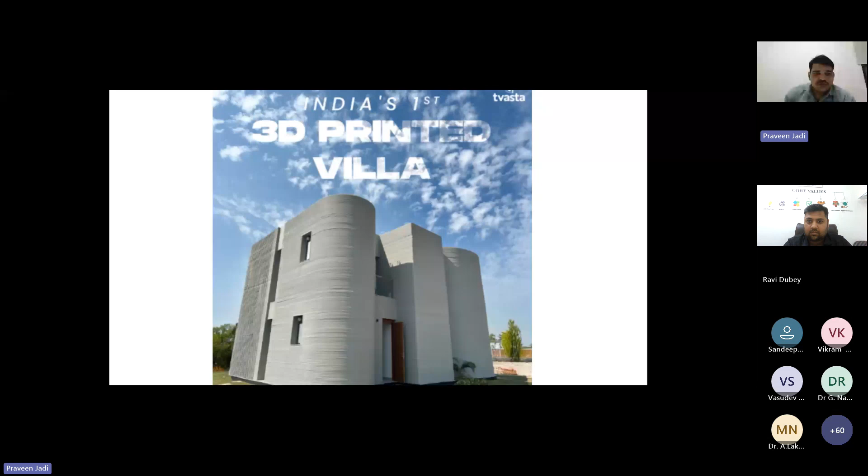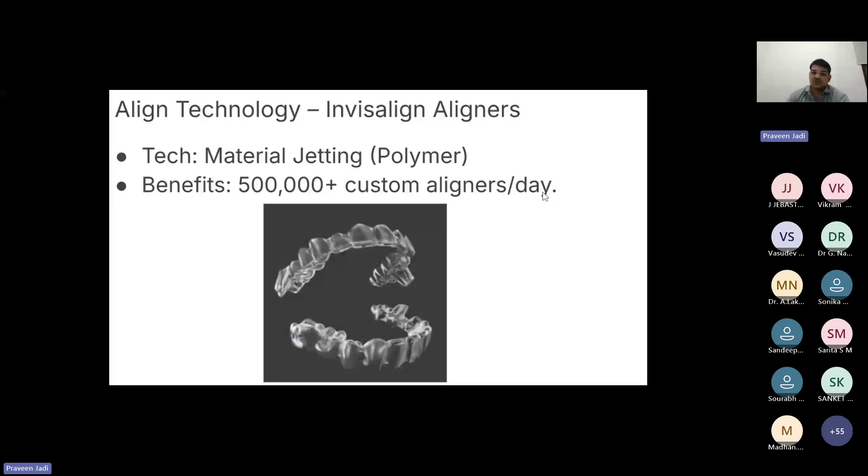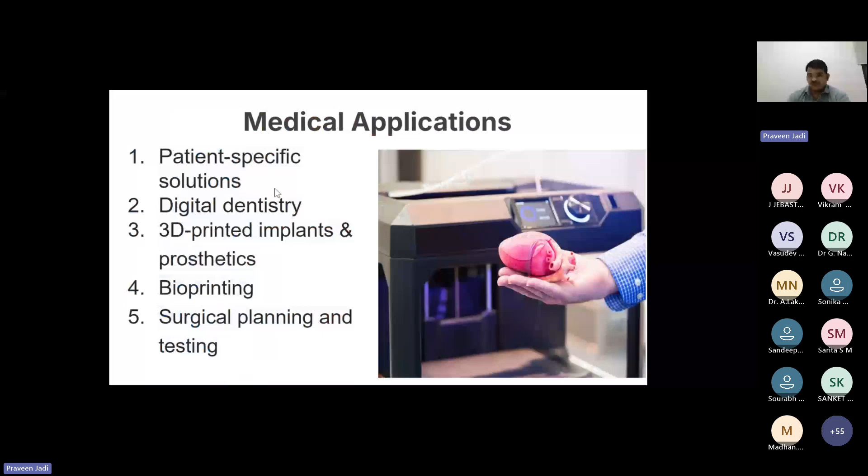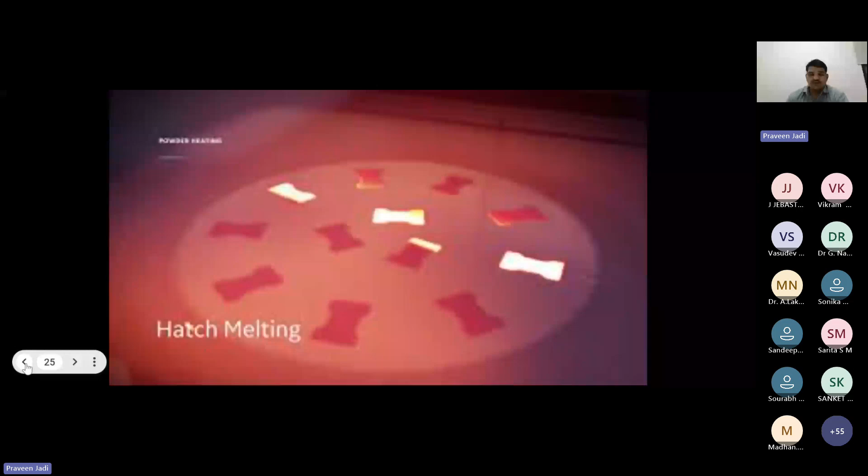Then sir, another area is new technologies. Suppose you have a very good technology not available in India, you can come to us. Our technical team will guide you and check your feasibility, and accordingly we will fund it too, sir.

Sir, another question: are you offering any internship courses? We are offering, sir - every 3 months we offer around 10 plus internships. Next month we are going for another 10 plus internships, sir.

For internships, they come here and learn how to slice metal parts - metal 3D printing, SLS 3D printing, FDM 3D printing, slicing to post-processing for metals, SLS, and FDM. They will also get recruitment opportunities because our EPIC center in India - any private or government sector company has to report to us. So we connect them.

Is there any recruitment opportunity? They will contact us. Whoever is eligible and well-knowledgeable, having done training here, will get placements also in different industries.

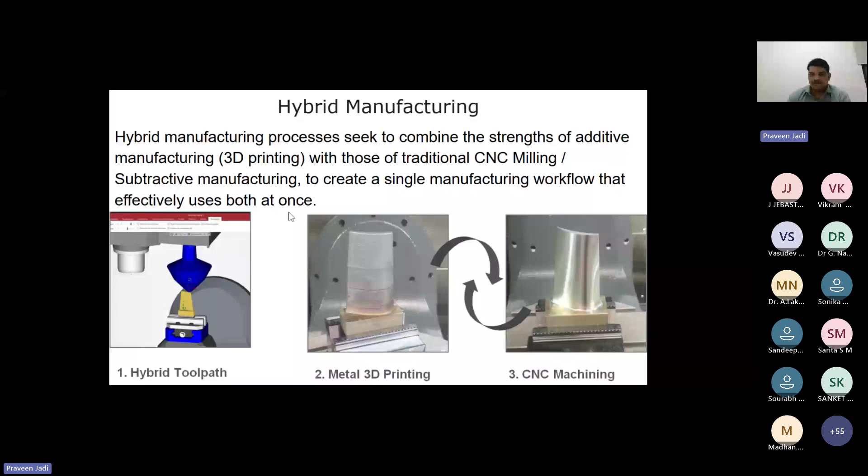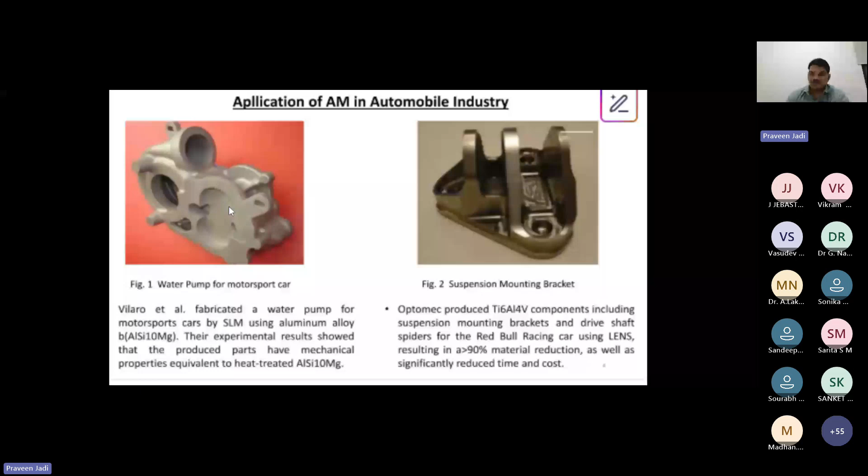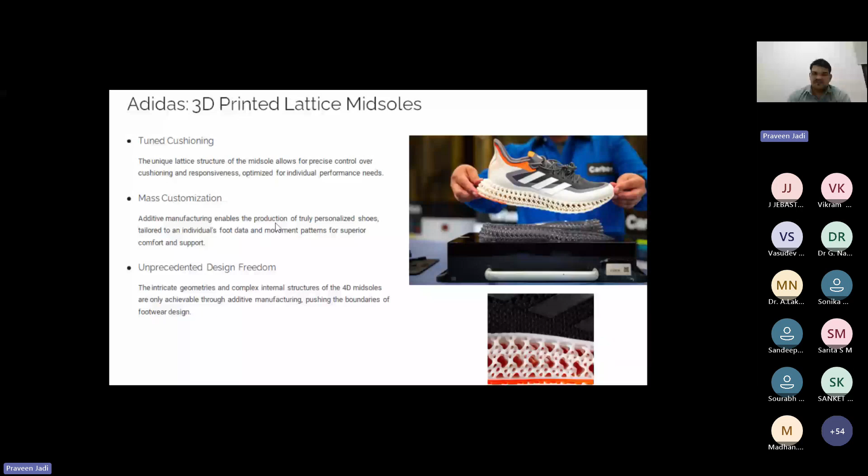I have given my number, sir. If you have any query - any technical need, or suppose if you are purchasing any machines for your project, whether it is feasible or not, we can explain. Any brand good in the market, which printer is good, we can also tell you. And any colleges or students who want to visit our facility to get trained, you can visit for a day, see our facility, and we will explain our entire end-to-end process, sir. I have given my mobile number.